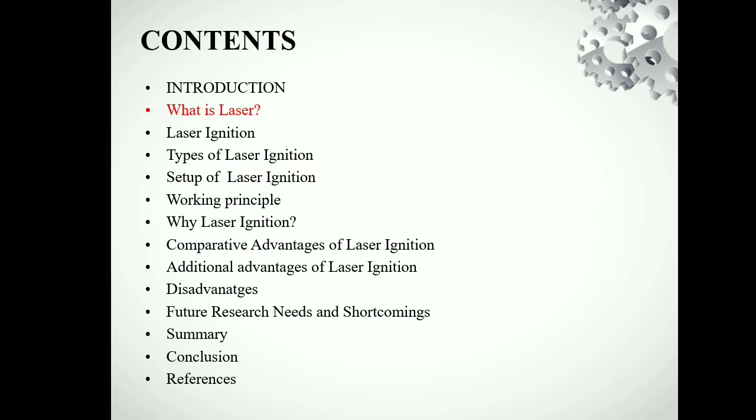Introduction. As we know, in the transportation and energy production sectors, internal combustion engines play a dominant role, and in technical appliances such as internal combustion engines, the adequate system performance of reliable ignition is very much necessary. Unfortunately, conventional spark plug ignition shows major disadvantages with the modern spray-guided combustion process, because it has not chosen the optimal ignition location. The laser ignition source has potential for improving engine combustion with respect to conventional spark plugs.

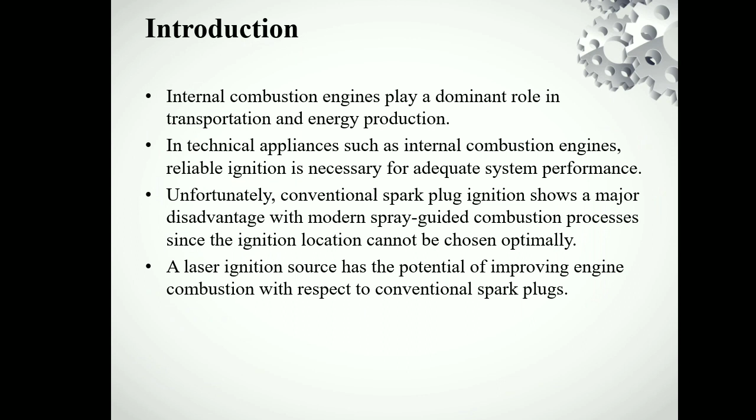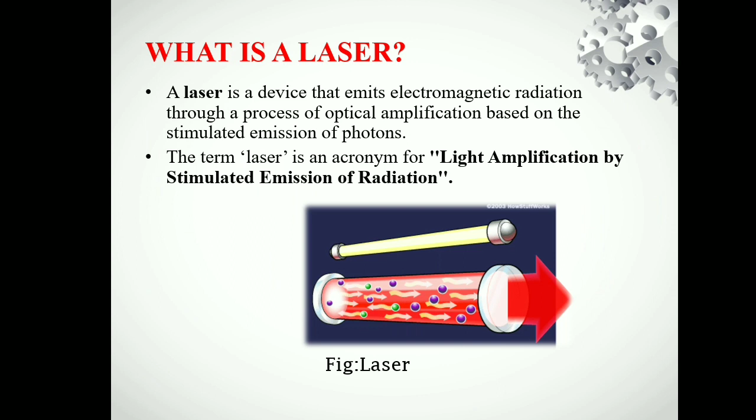So let us discuss what is laser. A laser is a device that produces an intense, focused, and coherent beam of light through a process called stimulated emission of radiation. It is an acronym that stands for Light Amplification by Stimulated Emission of Radiation. As we can see in this picture, this is how the laser looks, and it passes through an optic.

So what is laser ignition system? A laser ignition system is where a laser is typically focused onto a small spot within the combustion chamber where the fuel is present. The laser beam rapidly hits the air-fuel mixture, creating a high energy plasma which ignites the mixture and initiates combustion. The laser can be pulsed, and the wavelength and energy of the laser can be optimized for the specific fuel being used, allowing for efficient and clean combustion.

The laser ignition or laser-induced system is the process of starting combustion by the stimulus of a laser light source. As we can see here in the laser ignition, this is the laser beam which is passing through the convex lens which we use to focus the laser light.

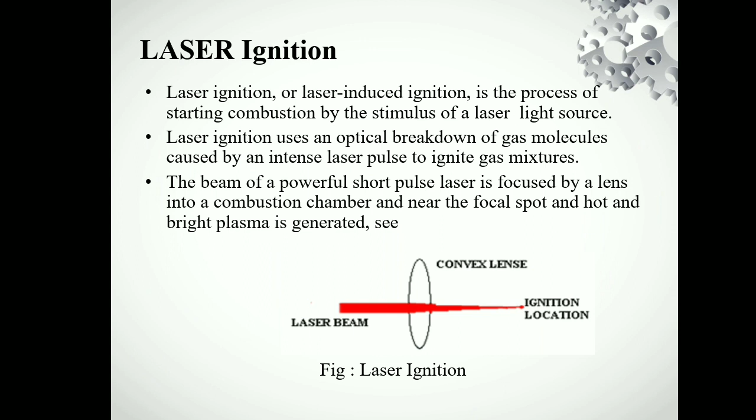To the ignition location. Let us discuss the types of laser ignition. Basically, energetic interactions of a laser with a gas may be classified into one of four schemes as described below. The first one is thermal initiation. In this method, it is suitable for fuel or oxidizer mixtures with strong absorption at the laser wavelength.

However, in gaseous or liquid mixtures, there are objections: thermal initiation is unlikely to be a preferred choice due to the energy absorption along the laser propagation direction. This method has been used successfully for solid fuels due to their absorption ability at the infrared wavelength.

The next one is non-resonant breakdown. In this method, the light photon energy is in the visible and the UV range of the spectrum or multi-photon processes are required for molecular ionization. This process shortly leads to an electron avalanche, and ends with gas breakdown and ignition.

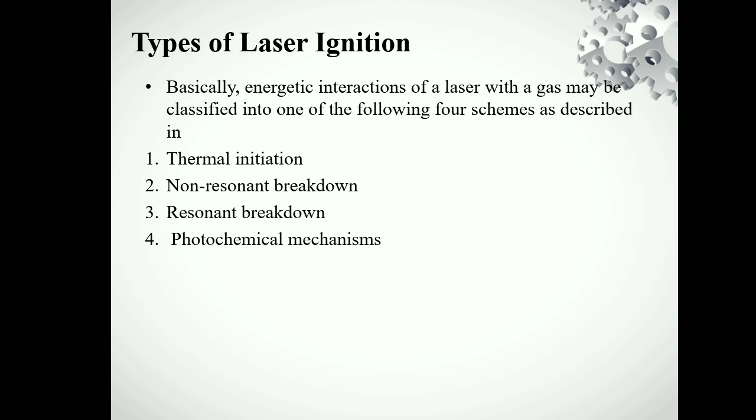If the production rate of the radicals produced by this approach is higher than the recombination rate, then the highly active species will reach a higher value, leading to ignition. This radical number augmentation scenario is named chain branching in chemical terms.

Let us move to the laser ignition setup. So this is the laser ignition setup.

Here we can see the laser source which is providing the beam from this device, and we are using a convex lens here, which is focusing the laser beam into the optical fiber, helping the laser to project to the combustion chamber.

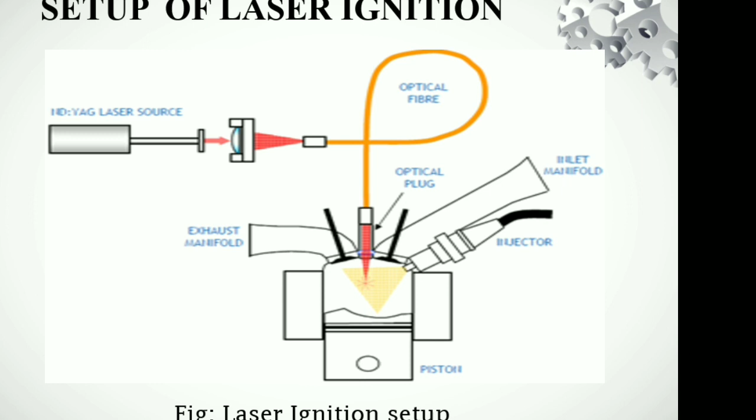This is how an optical plug is connected to the chamber here, and this is how the laser moves in. This is the exhauster, and here the fuel is injected through the injector, and at the same time combustion takes place. This is the laser ignition setup.

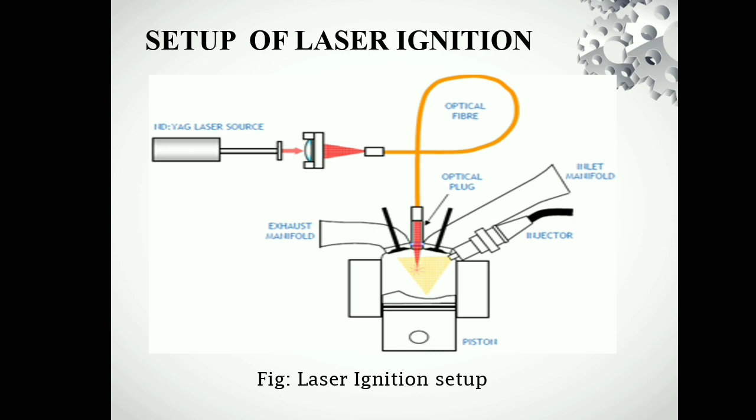So let us discuss the working principle of the laser ignition system. In our laser ignition system, a laser is typically focused onto a small spot within the combustion chamber, where the fuel is present.

The laser beam then rapidly heats the air-fuel mixture inside the chamber, creating a high energy plasma which ignites the mixture and initiates combustion.

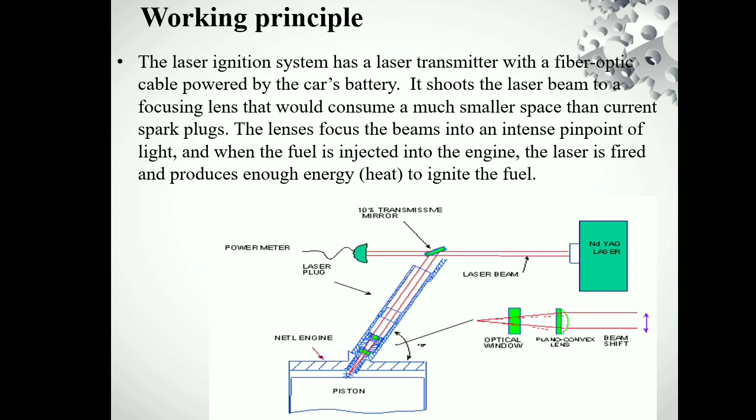The laser can be pulsed, and the wavelength and energy of the laser can be optimized for the specific fuel being used in the combustion process in the engine, allowing for efficiency and clean combustion of the fuel.

So this is the process here, as you can see the piston in this diagram.

Let us discuss why we should use laser ignition systems. As we can see, economic as well as environmental constraints demand a future reduction in fuel consumption and exhaust emissions of motor vehicles. At the moment, direct injection of fuel offers the highest potential for reducing fuel consumption and exhaust emissions.

First, regulations on NOx emissions are pushing us towards leaner air-fuel ratios. These leaner ratios are harder to ignite and require higher ignition energies. Spark plugs can ignite lean fuel mixtures but only by increasing spark energy. Unfortunately, these high voltages erode the spark plug.

In contrast, lasers, which ignite the air-fuel mixture with concentrated optical energy, have no electrode and are not affected, so they won't get eroded.

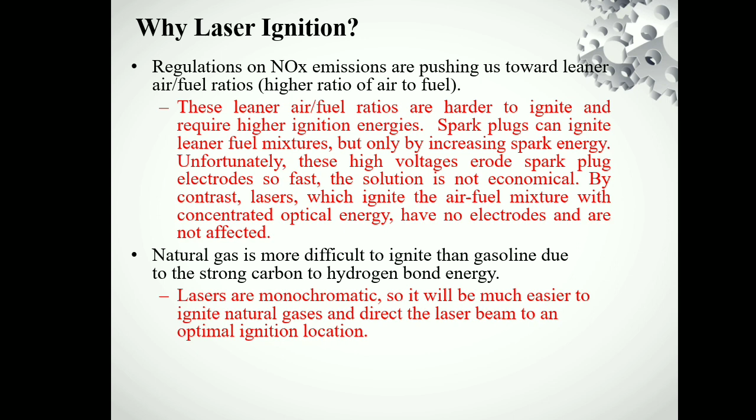Second, natural gas is more difficult to ignite than gasoline due to the strong carbon and hydrogen bonds. Since lasers are monochromatic, it will be much easier to ignite natural gases, and to direct the laser beam to an optimal ignition location.

Especially the thermodynamic requirements of a high compression ratio and a high power density are fulfilled by laser ignition systems only. Also, the optical wire and laser setup is much smaller than current spark plug models, allowing for different design opportunities.

The laser will reduce erosion in the system, and it also produces more stable combustion, so you need to put less fuel into the cylinder, therefore increasing the efficiency of the engine.

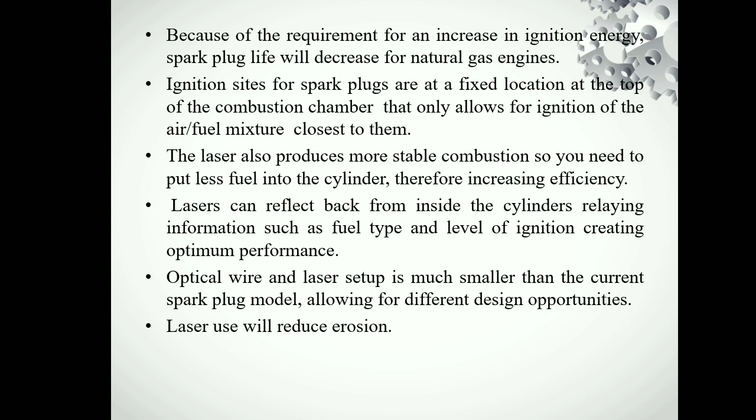Let us discuss the comparative advantages of the laser ignition system along with the spark ignition system we are using today. The spark ignition system has less intense sparks compared to laser ignition. The laser ignition system has a leaner mixture and the ability to burn it effectively, whereas the spark ignition system cannot burn leaner mixtures, and flame propagation is very slow compared to the laser ignition system.

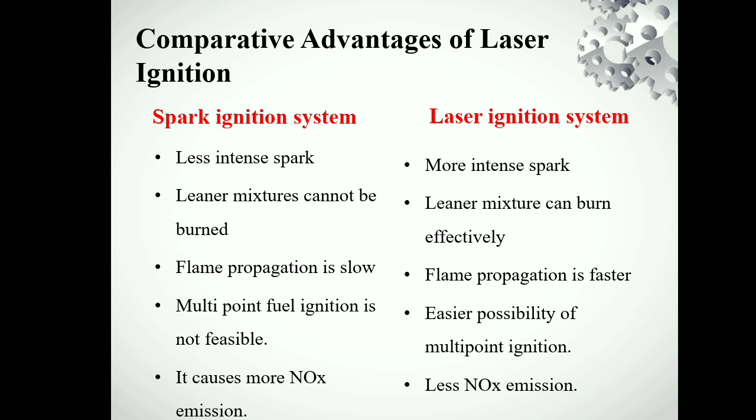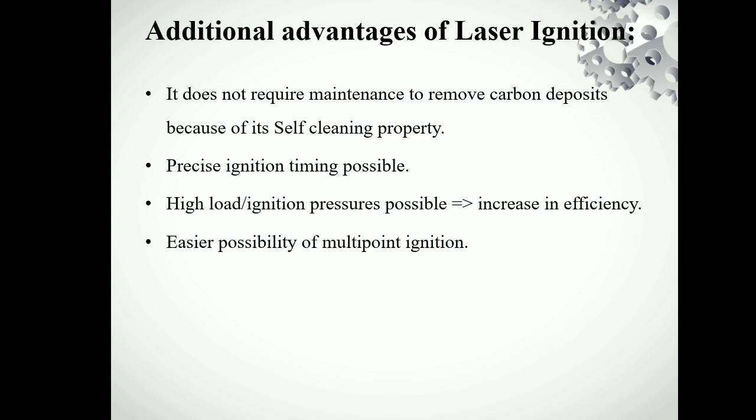In the spark ignition system, multi-point fuel ignition is not feasible, whereas multiple point ignition is very much possible in laser ignition systems. These are some additional advantages of laser ignition: it does not require maintenance to remove carbon deposits because of its self-cleaning property. It also has precise ignition timing possibilities, and high load or ignition pressure possibilities, which increases efficiency, along with the easier possibility of multi-point ignition.

Let us discuss the disadvantages of the laser ignition system. It has a high cost, and can be more expensive than traditional spark plug systems. The lasers used require complex and precise optics, which adds to the overall cost of the system.

There is also laser-induced optical damage, and the concept is proven but not yet commercial - commercial systems are not physically available in the market yet. It is also more complex than traditional spark plug systems, requiring sophisticated optics, electronics, and control systems.

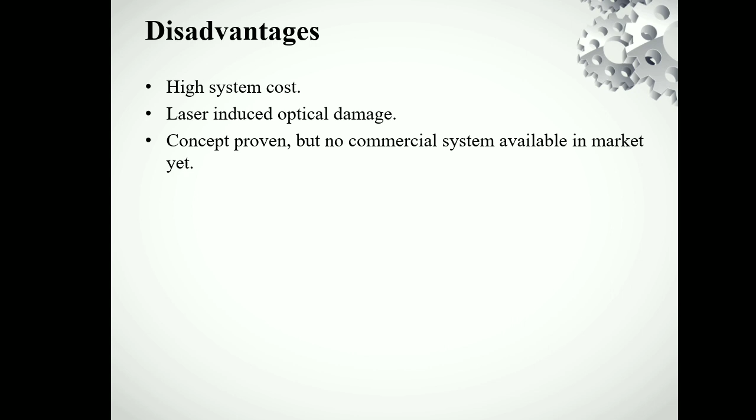Another disadvantage is the power requirement. It requires a significant amount of energy to generate the high energy laser beams needed for the ignition process. These are the disadvantages of laser ignition systems.

Now let us discuss the future work needed and the shortcomings. First is laser parameter optimization, which includes wavelength, pulse duration, energy, and focus spot size, which can significantly affect the ignition process and combustion dynamics of the engine. This needs to be done in the future, because understanding combustion dynamics for laser ignition, including ignition delay and flame propagation, still needs research.

Durability and reliability research needs to establish that laser ignition systems are robust, reliable, and have a long service life. They also need to work on cost effectiveness, so the system can be affordable for everyone.

Regarding fuel flexibility, studies have primarily been done with conventional gasoline engines. Performance with alternative fuels such as biofuels, hydrogen, and natural gas needs further research. These are some of the future research areas that need to be done.

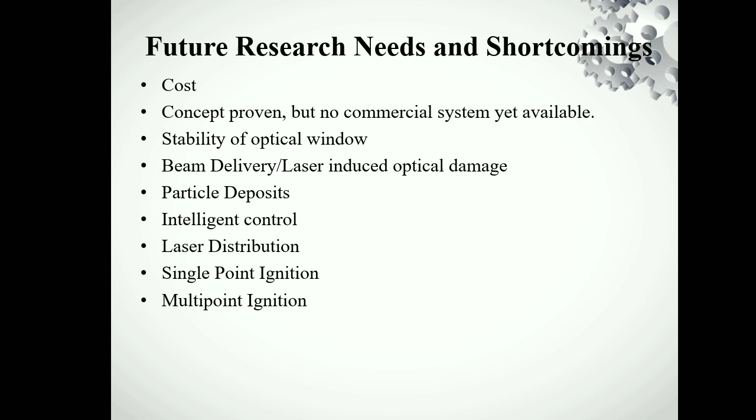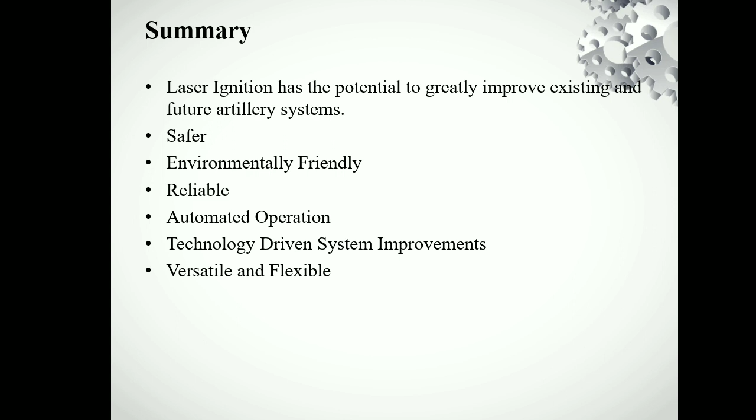Now for the summary of the laser ignition system: it has the potential to greatly improve existing and future artillery systems, and it is safer, environmentally friendly, reliable, and automated. It has automated operation, technology-driven improvements, and it is versatile and flexible. This is the conclusion I have written after studying the laser ignition system.

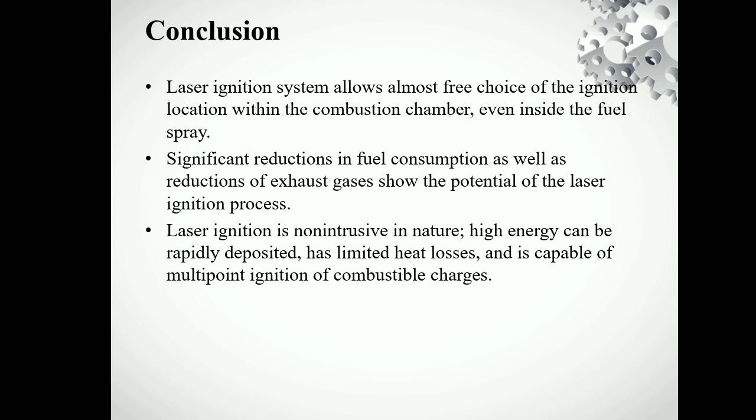The laser ignition system allows almost free choice of the ignition location within the combustion chamber, even inside the fuel spray. The significant reduction in fuel consumption, as well as reductions in exhaust gases, shows the potential of the laser ignition process. Laser ignition is non-intrusive in nature, high energy can be rapidly deposited, it has limited heat losses, and it is capable of multi-point ignition of the combustible charges.